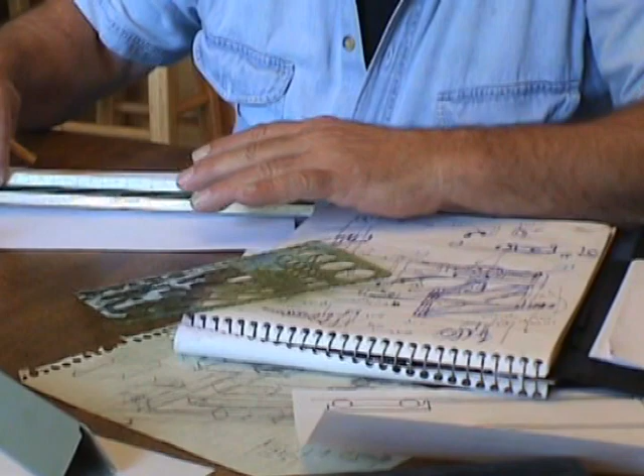What if an inventor could develop something so extraordinary that it had the potential to influence the way entire industries do business in this country? What if this inventor could design a superstructural material so strong it would revolutionize the way engineers design and manufacture structural materials used in everything from fire engine ladders to steel girders and skyscrapers? What if this technological innovation was so radical that it would do for the steel beam what the steel beam did for the wood beam of centuries past?

Just such a breakthrough has occurred. A.J. Sesternino received a patent in December 2012 that will not only impact the world of structural engineering, but will also have a positive influence on our environment. His patent is changing the way carbon fiber, the strongest substance known to man, can be used to improve our world. His technology will require fewer natural resources, like trees, to be consumed in the construction of products currently being used today, like railroad ties and telephone poles.

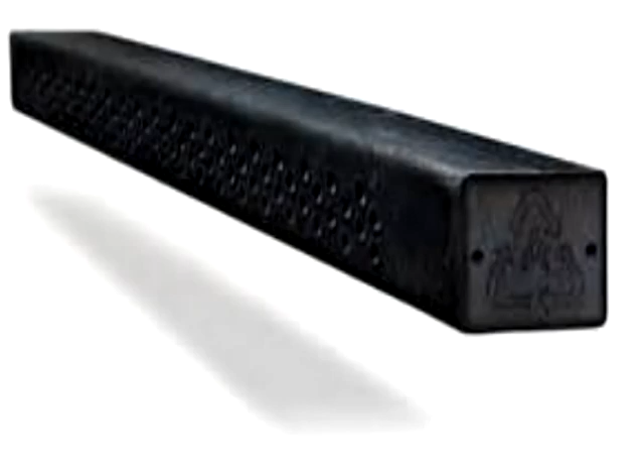Worldwide, these two products alone consume a multitude of trees each year. Mr. Sesternino's solution helps address this natural resource problem, as well as helps reduce the amount of discarded plastics impacting our landfills. With respect to railroad ties, Mr. Sesternino's technology avoids the limitations currently associated with concrete and synthetic railroad ties. His proposed railroad tie is not subject to fracturing from vibrations causing premature failure, which is associated with the concrete tie. And with respect to the synthetic tie, Mr. Sesternino's railroad tie is capable of handling much heavier loads due to the presence of a carbon fiber rod insert.

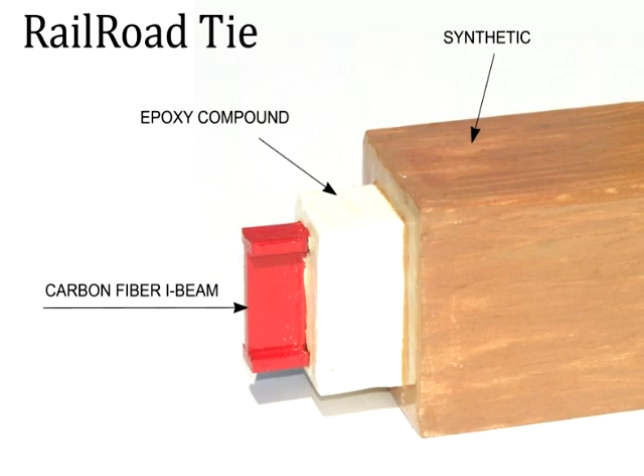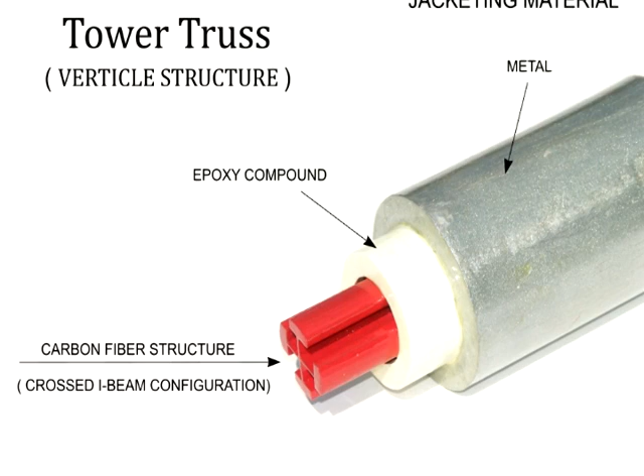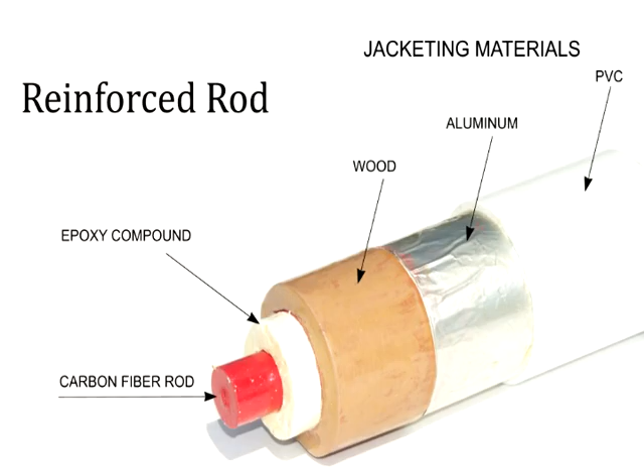Mr. Sesternino has designed a synthetic utility pole using discarded plastics from landfills that includes his carbon fiber rod insert. His synthetic carbon fiber poles are stronger, lighter, environmentally friendly, and much longer lasting than wood poles. Several Canadian municipalities have expressed interest in Mr. Sesternino's project and would be receptive to purchasing his synthetic carbon fiber utility pole once they go into production. Mr. Sesternino's utility pole design can be slightly modified to be used in the construction of outdoor entertainment structures that will not be subject to wind loads that can cause structural failures and collapse.

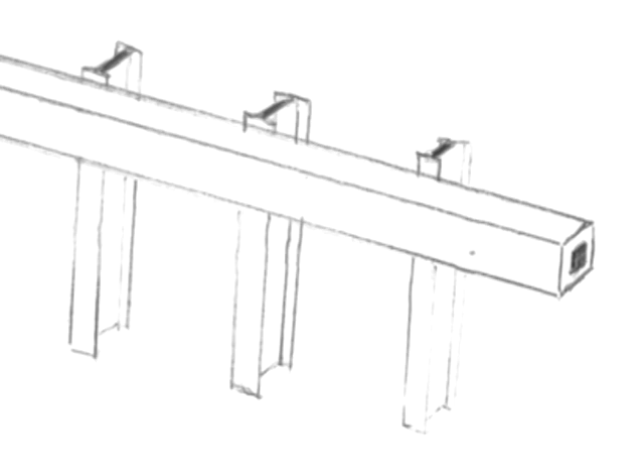Highway safety is a concern for us all. Mr. Sesternino's carbon fiber insert in highway safety rails will add to their safety, making them less susceptible to impact failure. Mines, tunnels, and bridges can all benefit from this technology, especially the girding up of our aging highway bridges.

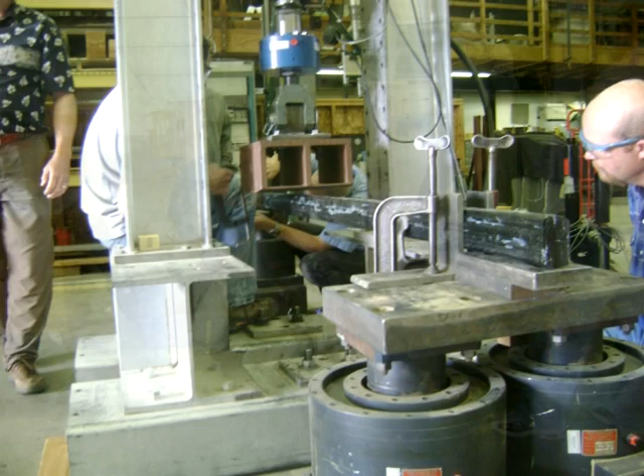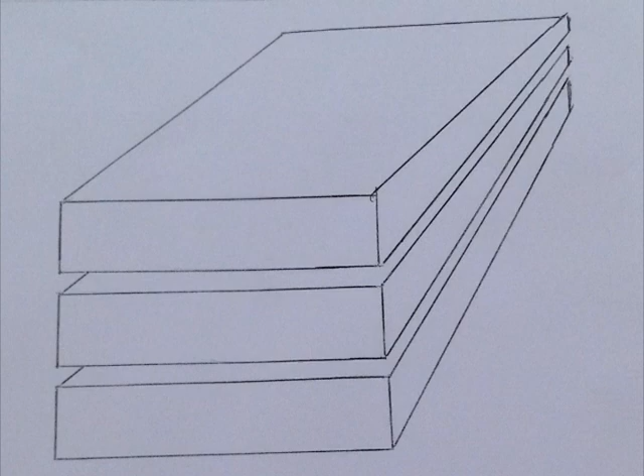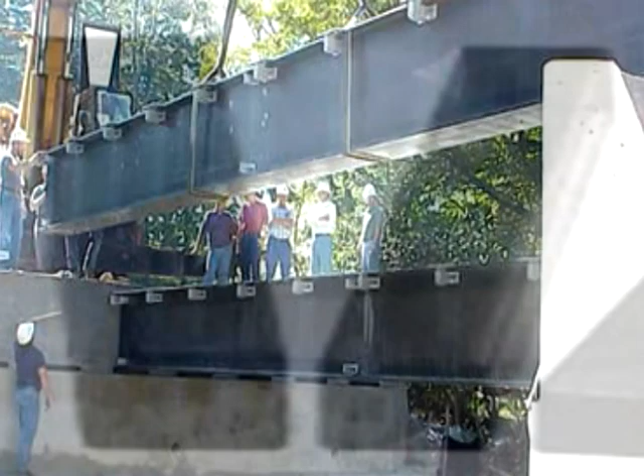The testing done at Washington State University to prove the practicality of Mr. Sesternino's patent confirmed that, first, the encasement of the carbon fiber rods in a protective jacket was a viable approach to solving the attachment problem, where carbon fiber rods would not have to be drilled or laminated, which weakens them structurally, thus limiting their usefulness. Secondly, a carbon fiber rod could be made larger than 1 5/8 inches, a serious limitation plaguing the carbon industry. By overcoming the limitations of size, carbon fiber rods can conceivably be fabricated to any size needed to meet major construction needs, like making large bridge and tunnel beams, which would be able to carry much heavier loads than what is currently possible today.

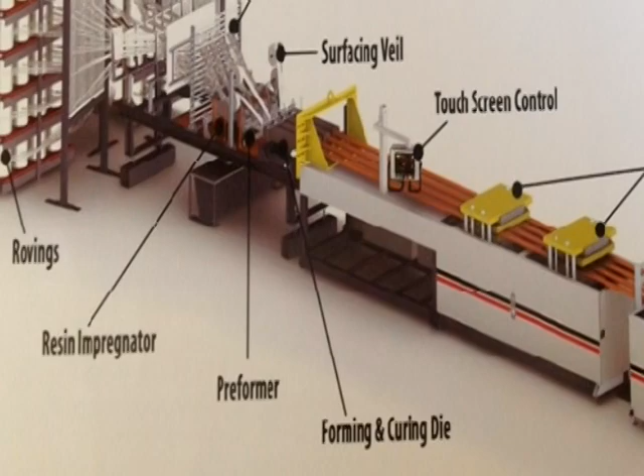What does Mr. Sesternino need from you? He needs your support through your donations to enable him to do what the carbon fiber industry hasn't done: build a machine capable of moving the use of carbon fiber to a whole new level of serviceability, while at the same time reducing the impact on our environment. This is an environmentally friendly solution to our human resource needs.

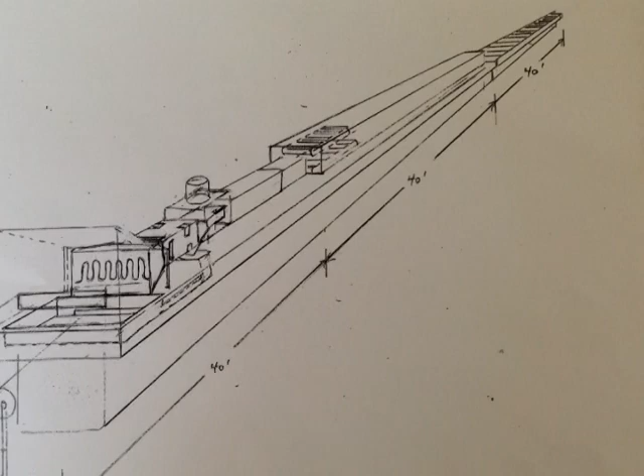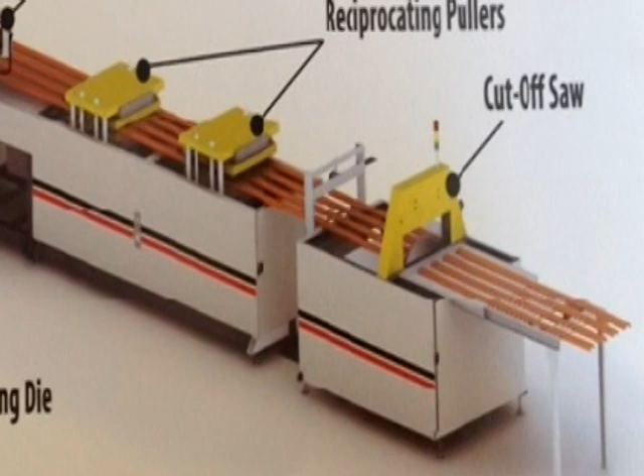Mr. Sesternino's machine is essentially a modified pultrusion machine that not only shapes the carbon fiber, but cures it in one operation. Carbon fiber strings start at one end of his modified pultrusion machine, and a completed carbon fiber rod emerges at the other end, built to the size and shape specified.

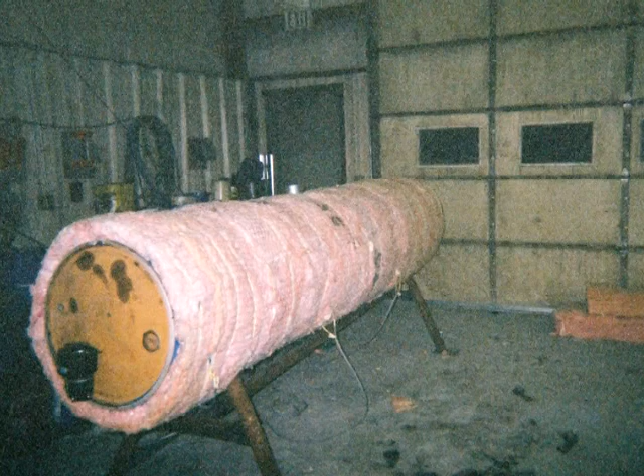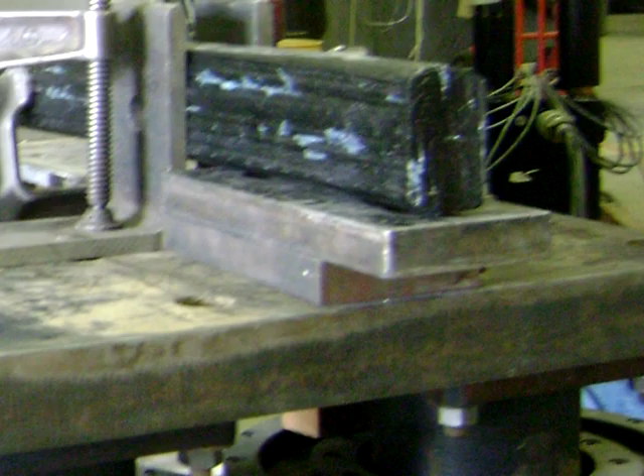Mr. Sestanino built his own autoclave to cure the carbon fiber rods he made for his patent, at a fraction of the cost of autoclaves being sold by manufacturers. Carbon fiber industry spokesmen were surprised that Mr. Sestanino could build an autoclave out of mining pipes, oil drums, and electric stove parts, and cure a carbon fiber rod larger than 1 5/8 inches.

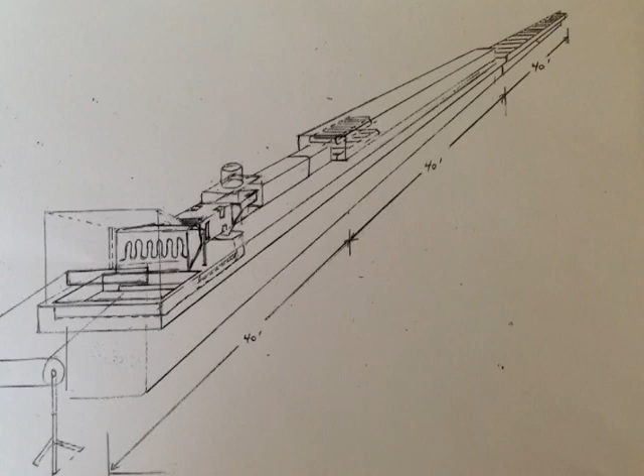After having designed and built gold mining machines for use in African riverbeds, Mr. Sestanino sees this project as a no-brainer. Thinking outside of the box not only has had its rewards, but has also brought its own set of problems. Just as with the encasement solution Mr. Sestanino presented to the carbon fiber industry, he is now encountering the same lack of vision with his modified pultrusion machine. Your help will enable Mr. Sestanino to bypass an industry's reluctance to change and open the door for environmentally friendly solutions to a multitude of structural challenges.